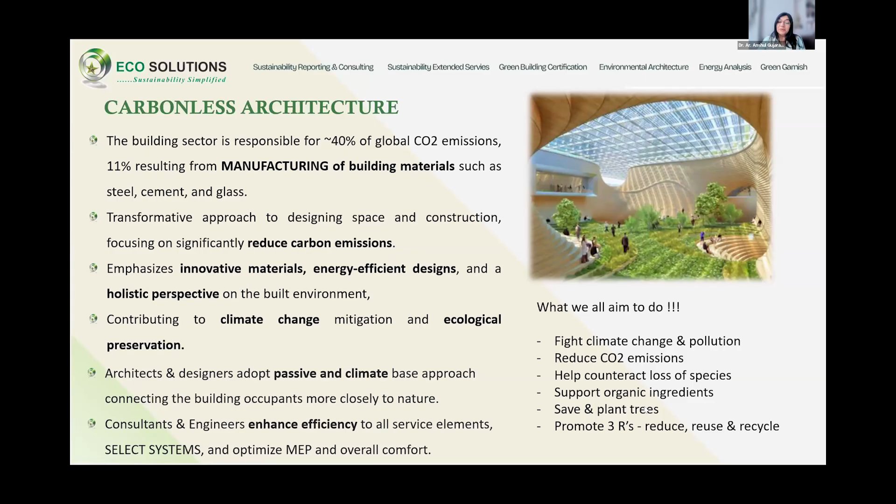So friends, what we actually do is aim to fight climate change and pollution, reduce CO2 emissions, help counteract loss of species, use organic ingredients. We are supporting saving trees. We are promoting the 3R principle and much more towards the larger goal, which is saving the climate and the earth.

Coming to the core concept of carbon, architects are supposed to be major influencers in terms of carbon for a building's life cycle, embodied carbon as well as operational carbon. So if we realize, about 10 to 15% scope of embodied carbon reduction remains with the architects, while for operational carbon it is 15 to 40%.

The adjoining table can actually show us how architects and other consultants stand responsible during various phases of a building's life cycle. Friends, when we are talking construction, we are also talking the design stage. We are talking operation, we are talking long-term O&M throughout the stage.

We are also talking retrofit nowadays on a large scale, and we cannot ignore it. Before going to that, we are also looking at the end of life, or again revamping the project.

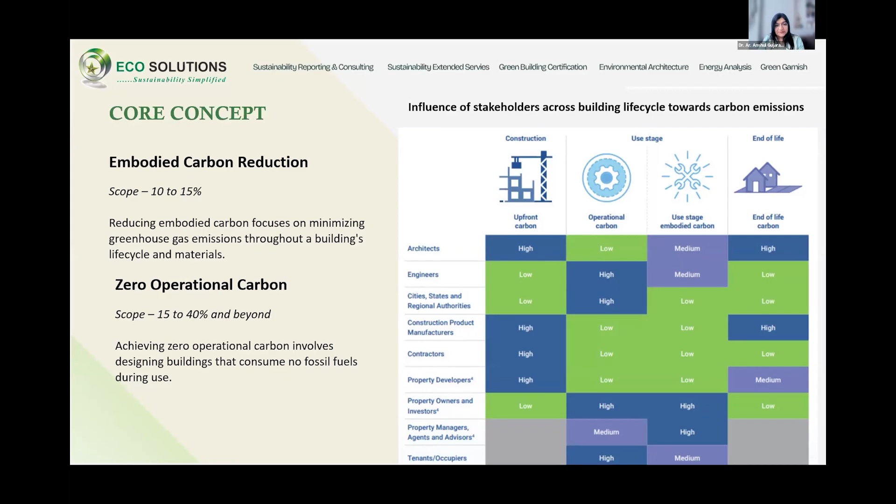So, talking about operational and embodied carbon from the architect's perspective, one thing that has been realized, which is really scary, is that the embodied carbon percentage has been going up. Today it is projected that by 2050 it will reach about 49%. When we anticipate this, it means we are reducing the life cycle of the entire built environment.

Hence, both must be addressed to achieve true carbon neutrality. Santoshji mentioned different tools for carbon assessments, talking about LCA, even analysis with scope 1, 2, 3, many other things, as well as building certifications.

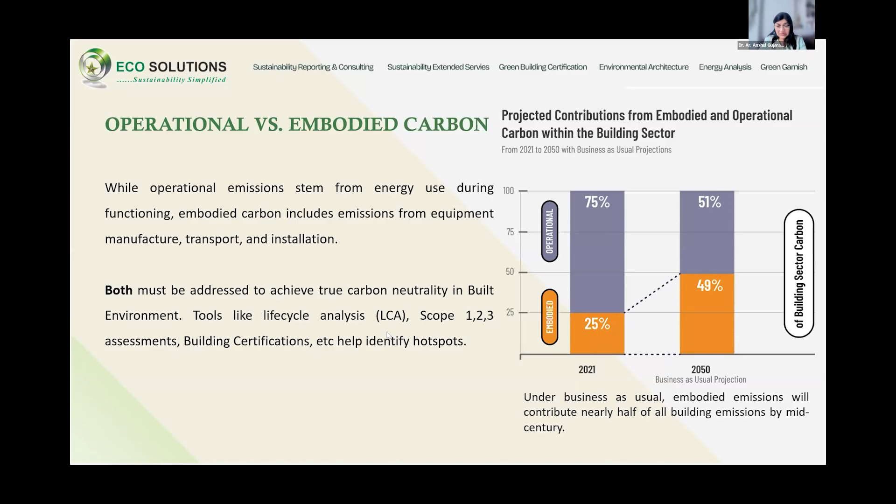Going a bit further about building certifications, I would like to mention the generic benefits already known, where we can see that reduction in basic resource usage, moving towards renewables, can actually help us have a better environment.

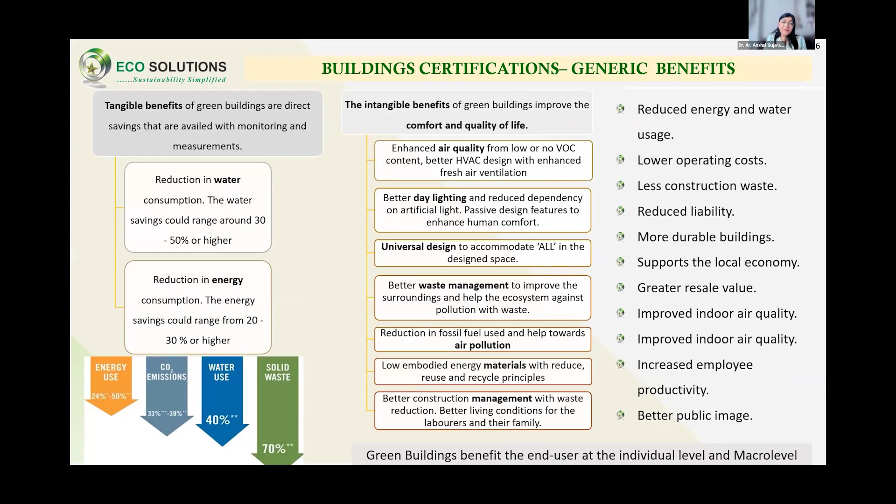But do we also realize that this approach through building certification is actually based on one very important principle, that is integration and holistic approach to sustainability. While talking about holistic life cycle approach, we definitely emphasize material sourcing. During the design stage, as well as other stages, we have to go back and forth for this, and look at long-term balance and resilience.

So when we talk about holistic life cycle approach, we usually take a turn and look back at biophilic design, net zero approach, or even building management systems, which can help us towards our common goal. The architects often focus upon the passive approach, climate design, choice of materials, and integration of services with design.

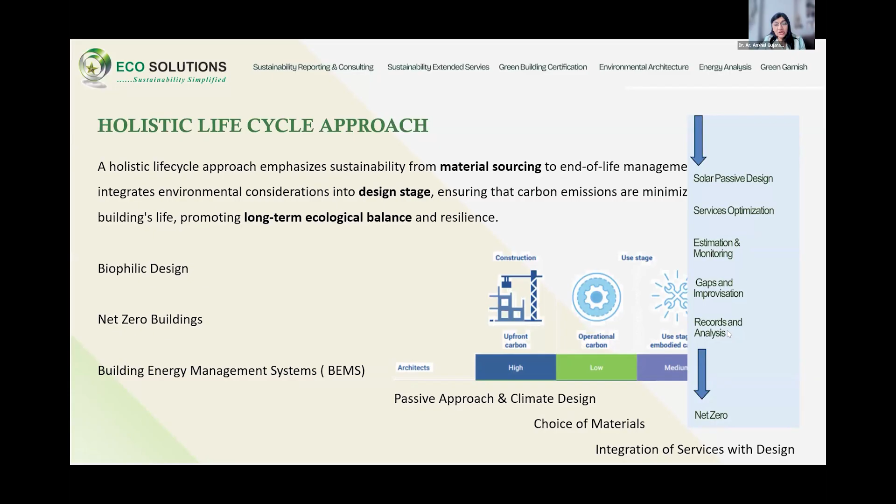So friends, a quick roadmap for any project through an architect's perspective can be solar passive design, optimization of services. Estimation never goes away from their scope — estimation, monitoring, gaps, improvisation, records, analysis, and definitely the journey towards net zero.

So going ahead, when an architect stands for designing any project for sustainability, the approach revolves around psychrometry, the climate, following the sun path, ensuring climate compatibility for inner spaces, activities, heat gain, relevant material and strategies for that, choosing local materials, performance, thermal comfort, and many more. So any strategy that supports the purpose, space, and aesthetics will be a sustainable strategy from the architect's point of view. I'm just quickly going through slides.

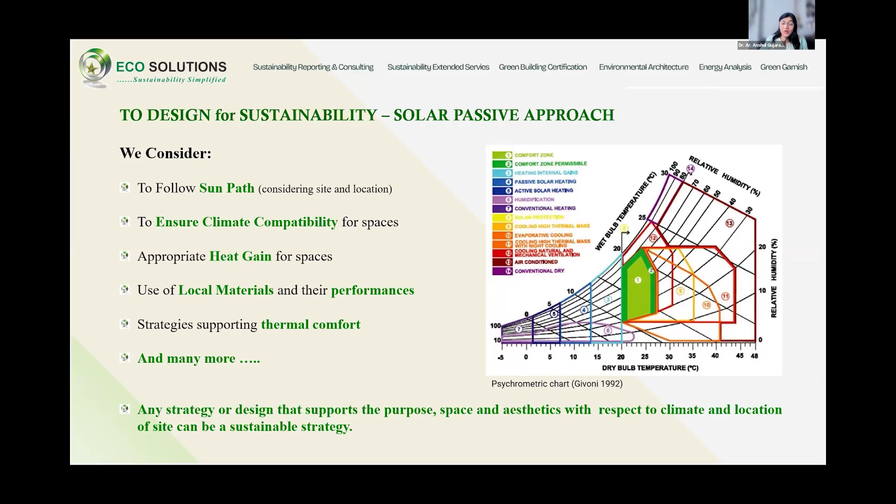Definitely you all have seen these images, but I will go through them because any architectural presentation relating to climate, sustainability, or carbonless architecture cannot miss them. We know how a typical building works in terms of passive analysis, with different types of sun movement, climatic strategies, winter sun, summer sun. Looking at sun path analysis, we define a typical space and orientation based on the climate for that particular region.

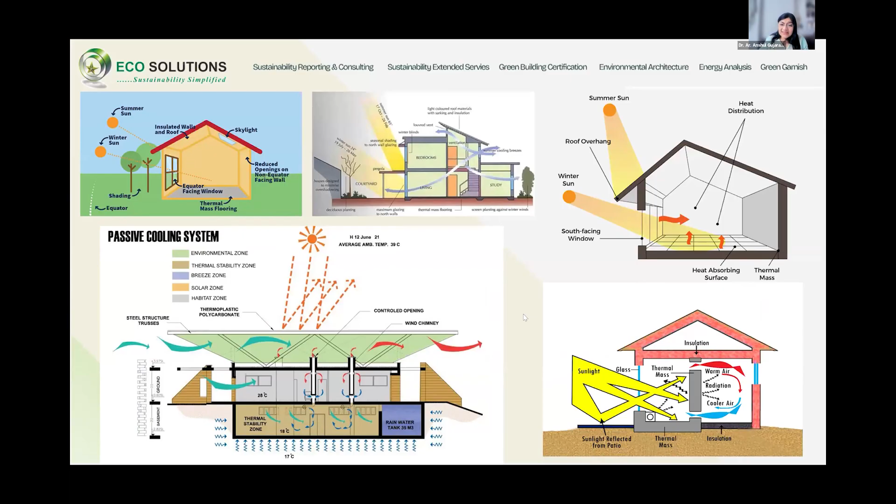Along with that, the next step is selecting the system, which can be passive if location and orientation help us. So location and orientation of the site for shadows and shades also matter, and the right orientation will give you the right efficiency in terms of overall building performance.

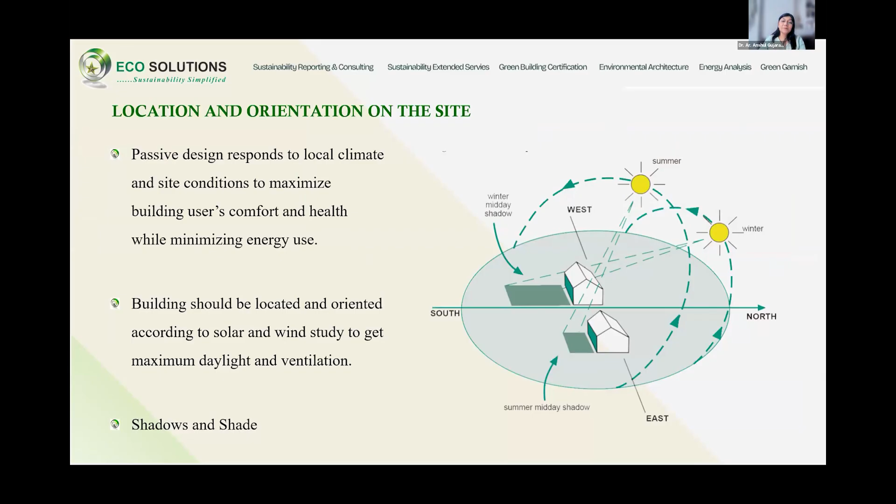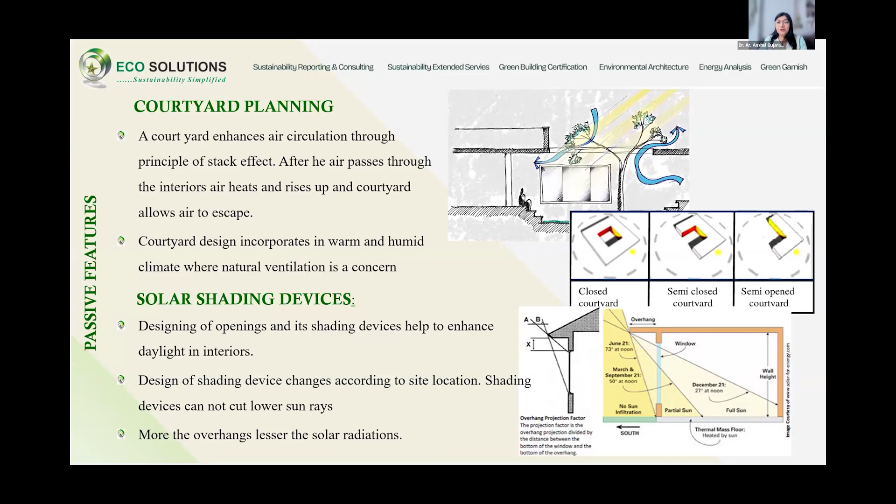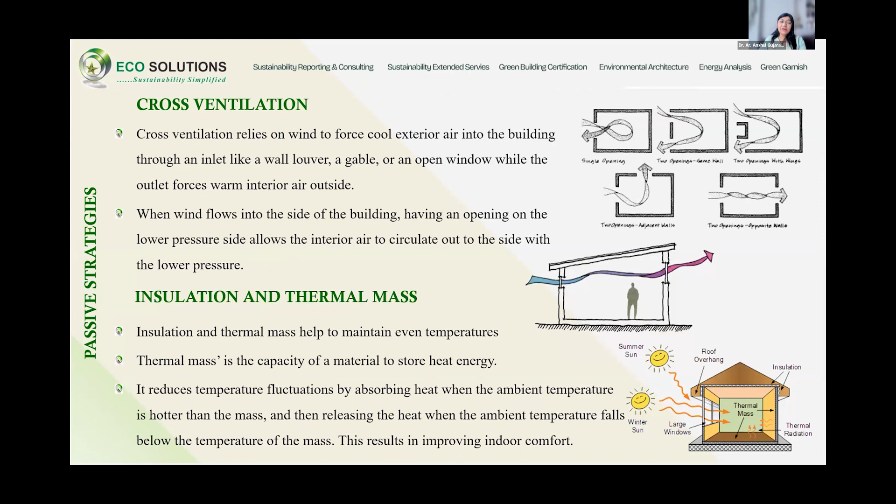Going next is some sustainable or passive strategies that can help based on the climate, design, and typology of the building. All these strategies can help save up to 40% of the building energy mass. Cross ventilation, insulation, courtyards, radiant cooling, radiant heating, wind towers - all these strategies stand very important when an architect is designing, along with the vegetation.

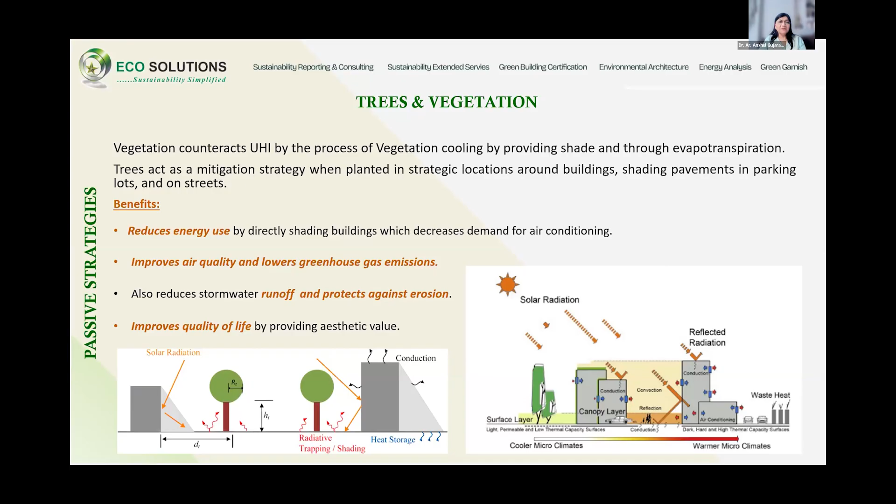Ideally, the landscape is defined as a next step of architecture, rather in combination with it. We often mistake landscape to be a separate element added at a later stage, which is not the case. Landscape should always go hand in hand, and this proves a very important strategy when it comes to carbon-free architecture. A few more views to define the renewable energy part of it, the right plantation going up to the area where you have maximum horizontal radiation coming in.

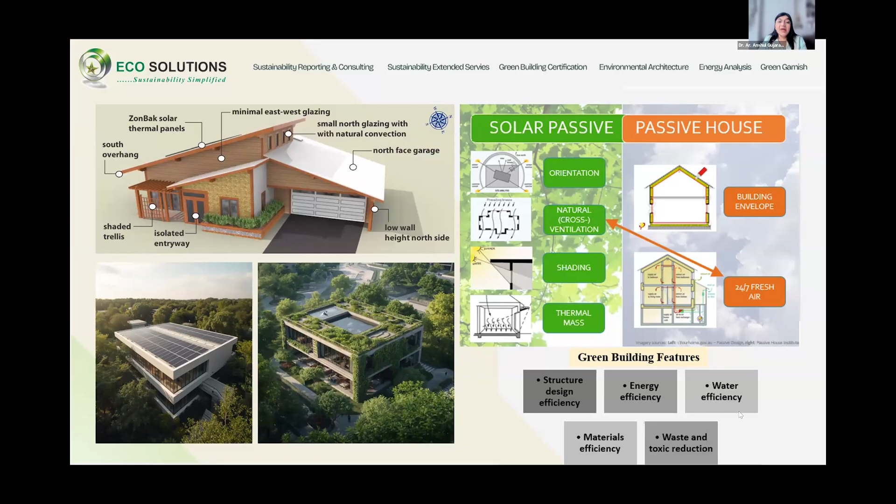Going with SRI paints or materials which are heat reflecting, then going with the passive approach, and definitely looking at features which are under design, energy, water, materials, and of course waste. So a vision of an architect definitely revolves around all these things, and most importantly, comfort.

So with all sustainable parameters, architects usually aim to design for uniqueness, functionality, purpose, and for the architecture or design to remain intact. Comfort and satisfaction, which is also realized by the end users, third party certification, happiness index, long term effective maintenance - but all of this within the cost.

So, looking at that, let us discuss a few case studies here. Friends, I might go over about 2-3 minutes, but please bear with me - the team can let me know if I'm losing my time. I think a few case studies here can definitely help us define how right carbonless architecture can work to the best or optimum level.

I'm restricting myself to the architecture part as I'm aware my colleagues will also be covering materials and other efficient technology sections. The first building we all are aware of is the Green Business Center, CII headquarters Hyderabad, India's first net zero building. It's beautifully defined architecture having first of its kind renewable energy installations, bifacial solar panels across the campus, and wind towers demonstrating how ventilation can be served in the best possible way with all the possible resources - a building that defines walking the talk.

Going next, I would enhance upon one of the buildings in Pune, which is a retrofit building. It's a 45-year-old building that came for retrofit and wanted to be under a certification program - the Bank of Maharashtra headquarters building. Now, if we see the sun path of this building, because it's a retrofit, they had a lot of limitations in terms of space and design, but with the right architectural approach, fenestration, and material choices, we could define the building with the right approach.

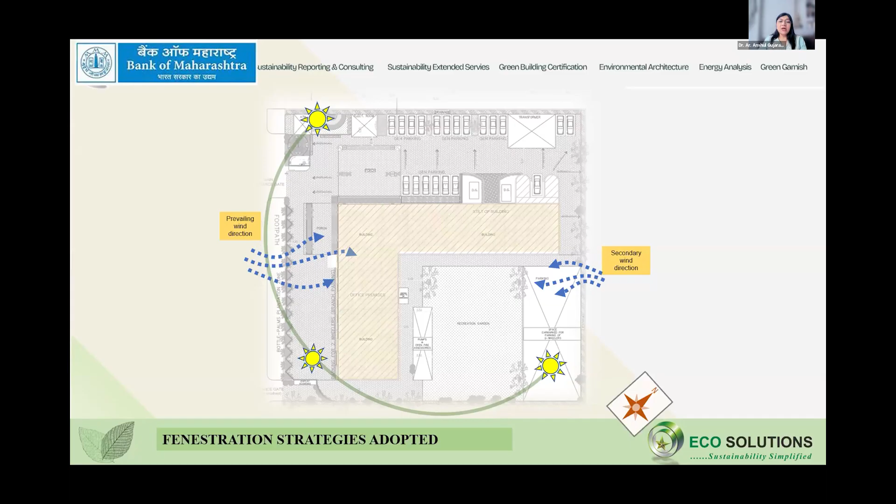So taking into account the habitable spaces with potential to go green, we tried to use minimum glass on the facade side with low VLT - visible light transmittance - because we had to create a noise barrier on this side being the main road. That is how the glass was defined for that particular aspect.

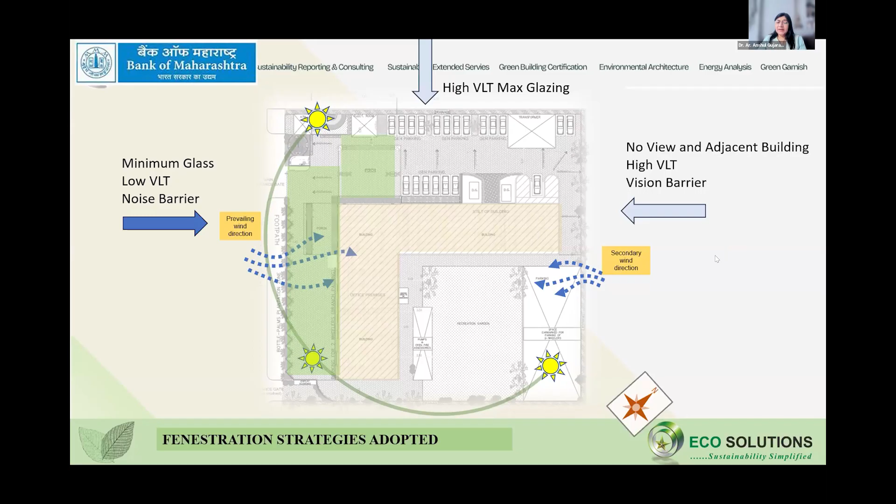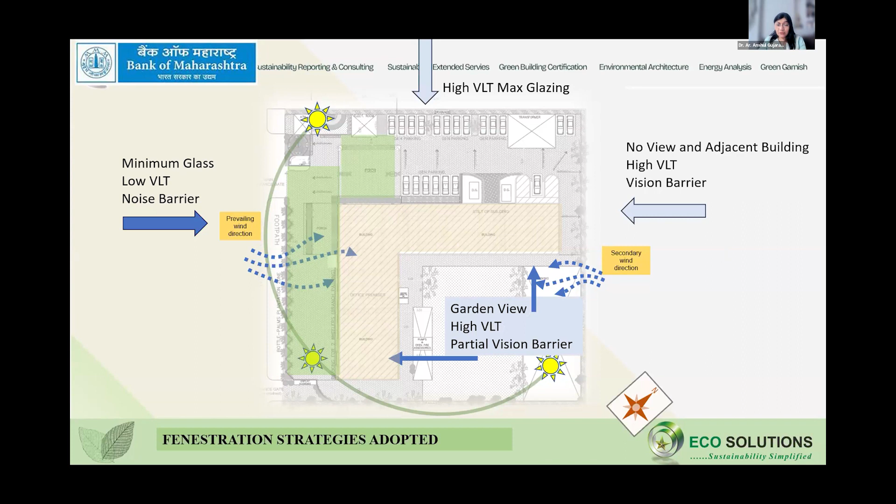On the other side of the building, we had glass with better VLT because we wanted more light coming in from this side, as we had the open part and the building exposed to occupied areas as well. On the other side there was no view - we had an adjacent building, so we tried to create a vision barrier with high VLT glass. On the garden view side, again high VLT, but it was a partial vision barrier. So accordingly, the glass chosen had a typical different approach.

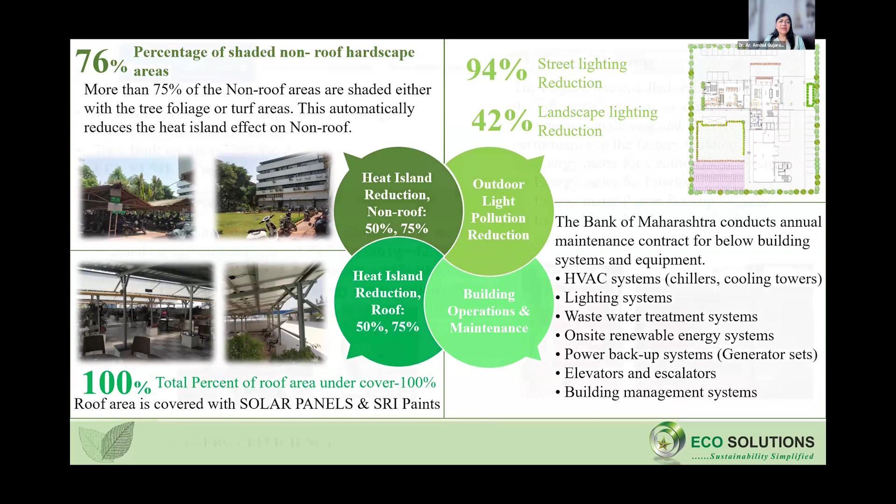So though the building was old, we tried experimenting with the glass, because glass becomes one of the most critical materials as far as the architecture is concerned. So taking care of heat island effect, roof and non-roof considerations, outdoor lighting pollution, O&M, landscape LPDs, indoor LPD, and exterior LPD - the building today stands as one of the major examples. It's an IGBC Gold certified existing building, a major example where it achieves 100% net zero waste.

EPI achieved is a very good EPI with 84.55. Along with that, this building has been transformed in the right ways, which is now also a green landmark, championing sustainability.

I'll just skip through it quite fast so you all can browse. We have ongoing monitoring, because it is not a one-time activity, as Santoshji rightly mentioned. So we are going with the right comfort survey for the occupants as well as the monitoring systems on.

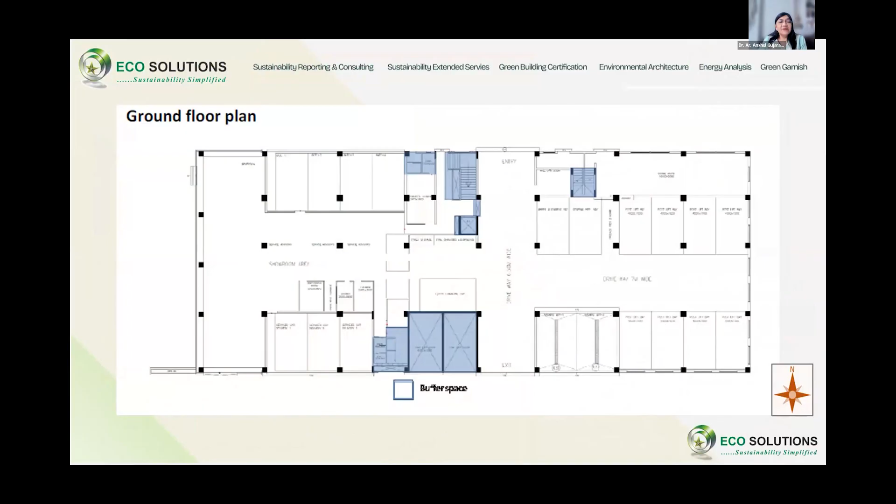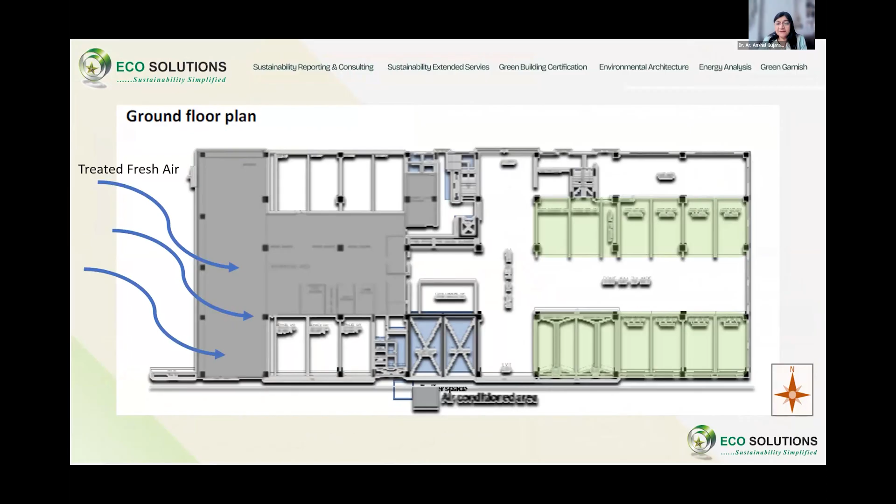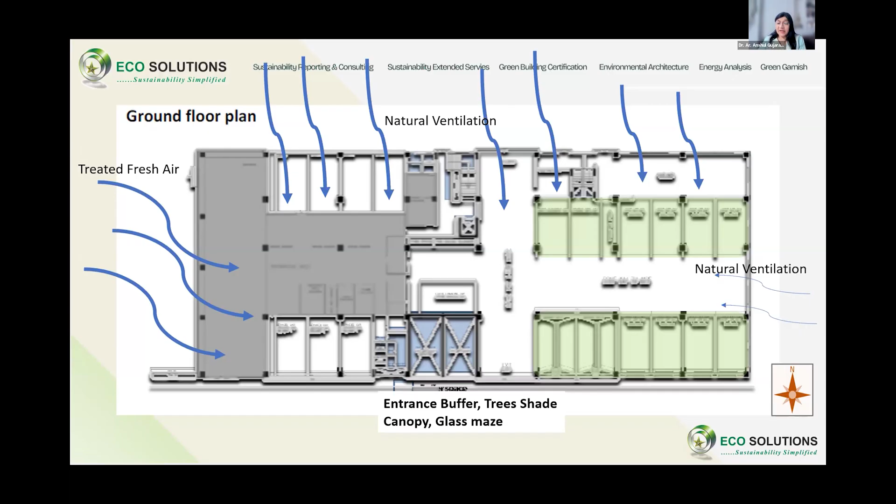Taking the next project into consideration, I've tried to include again a case study with glass, but a very different approach here, because having the plan this way, it's a showroom-cum-service center for BMW. We tried to analyze the HVAC areas and the areas under natural ventilation. So this side we have treated fresh air coming in, while on the other sides we have natural ventilation. The thickness of the arrows tells us the windrose and the intensity of the winds coming in for the project.

At the entrance, we had the buffer area, tree shading, canopy, and a glass maze created. If you see the building, we had HVAC zones defined, and zones defined for occupied spaces where more light is required, and accordingly a glass maze was created. Typical glass, but having different shades and emphasizing the building highlight as well, creating an architectural feature as well as substantiating the interior spaces.

Another project I would quickly show is Suhana Corporate House, wherein we started working on the ECM. Definitely the design credit goes to Tao Architecture, but along with our team, a lot of back and forth workings and ECMs were done to avoid direct heat gain.

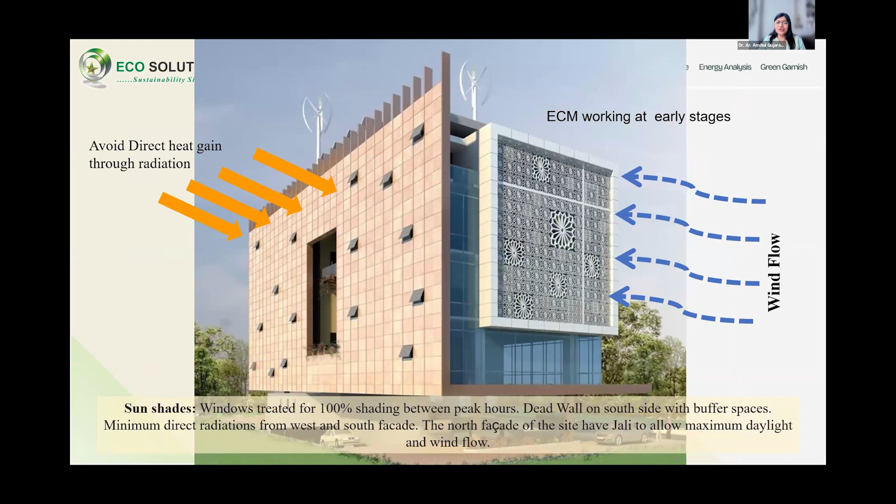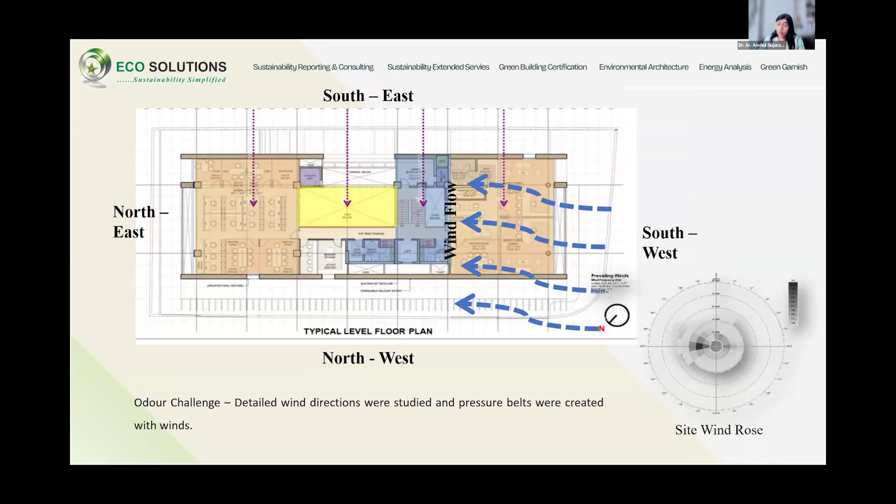We had the wind flow defined, and 100% shading was to be ensured. So all these things were done, and later on with the plan we experimented on what could be the best elevation possible, envelope possible, also considering the challenge on site, which was odor. So even the windrose was studied, and accordingly what we have today is, with the solar passive approach, optimized envelope, good materials, daylight and ventilation is optimum, and landscape is also tried to be created in all possible areas with odor control strategies.

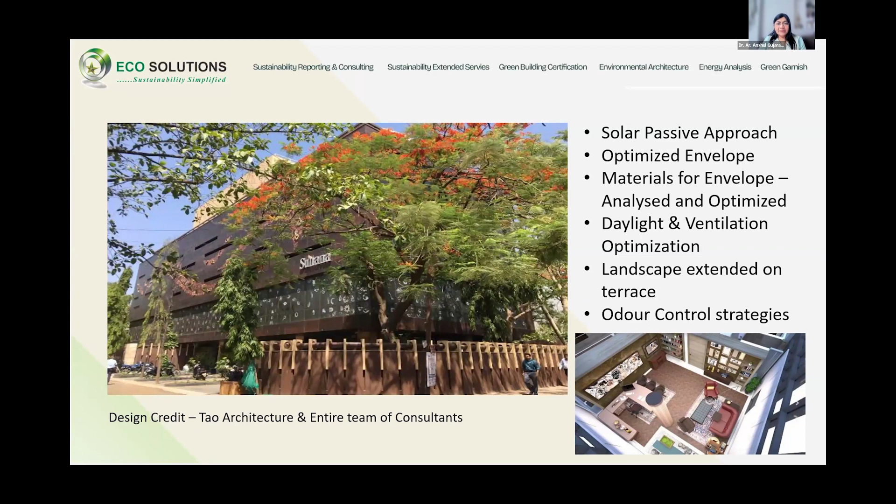Apart from the elevation, there was the right vegetation also, which was enhanced. You might find a lot of trees and tree cover, which is mixed, but this is an organic way the trees are there, which are being preserved. So again, a landmark, which is LEED Platinum certified.

Excuse me, ma'am. Yes, sorry. I have timing. Timing, yeah, yeah. Okay, thank you so much. Just quickly touch upon - yes, I will, I will be very quick.